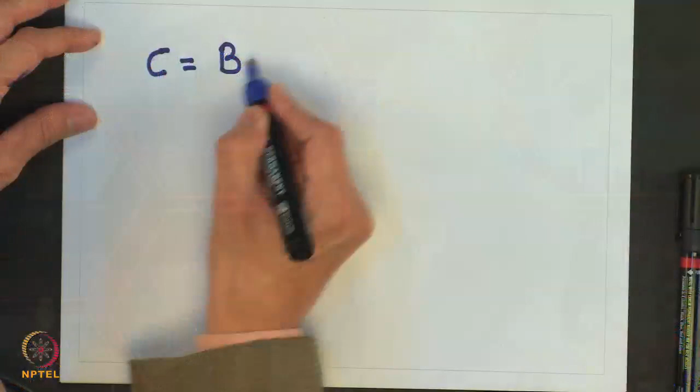We have seen that when the channel noise is additive, white and Gaussian with mean square value given say as NP, the channel capacity C of a band limited channel under the constraint of given signal power P average is given by this relationship. This is the signal power, this is the noise power, bits per second, and this is your channel bandwidth in hertz. Now, the maximum rate of transmission can be realized only if the input signal is a white Gaussian signal.

Okay. The question is now what happens to the channel capacity if I increase say signal power. From this expression it is very clear that when I increase the signal power my capacity will also increase. But what will happen if bandwidth increases? Say it goes to infinity, will channel capacity also go to infinity? Superficially the equation seems to indicate that, but this is not however true.

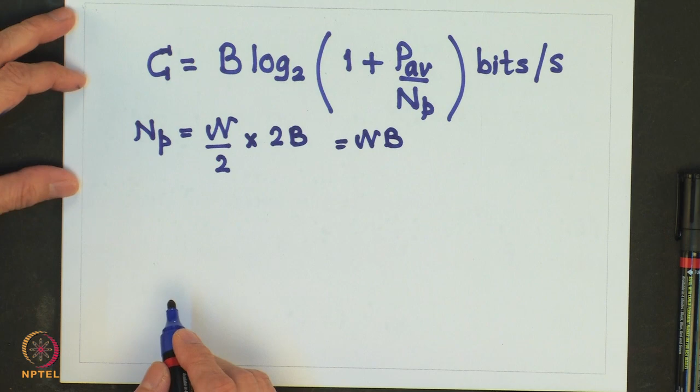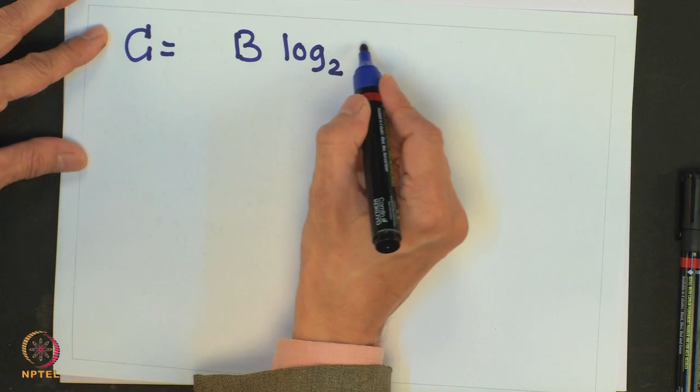The reason for that is basically to realize that the noise power NP is equal to power spectral density multiplied by twice the bandwidth. So, when the bandwidth increases, the noise power also increases. So, let us try to evaluate the channel capacity when B tends to infinity. So, our C is equal to B log to the base 2 of 1 plus signal power divided by noise power. Let us take the limit of this for B tending to infinity.

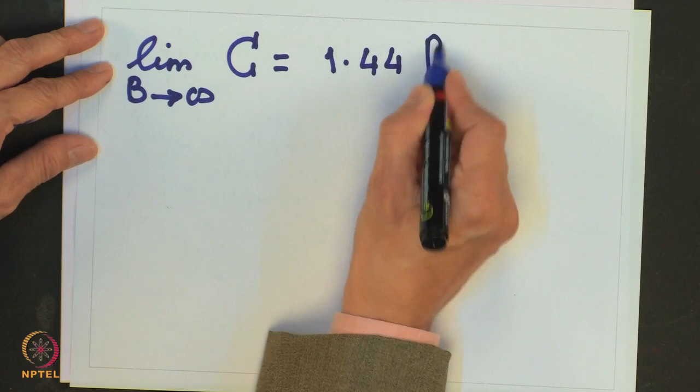This I can rewrite as, and the reason for doing this is basically I want to exploit this identity which says that limit x tending to infinity of x log to the base 2 of 1 plus 1 by x is equal to 1.44. So, now if I use this identity, it is very clear from here that my capacity when B tends to infinity is equal to 1.44 P average by W

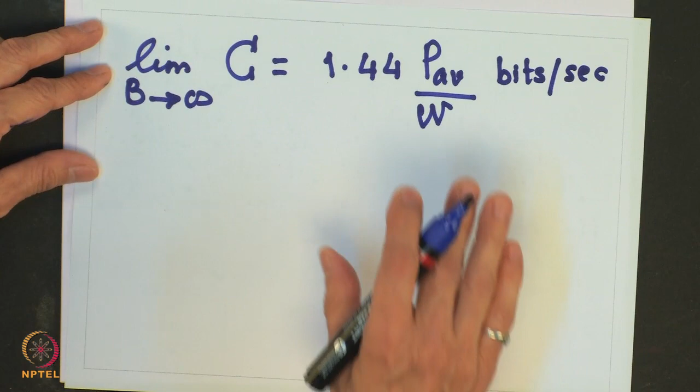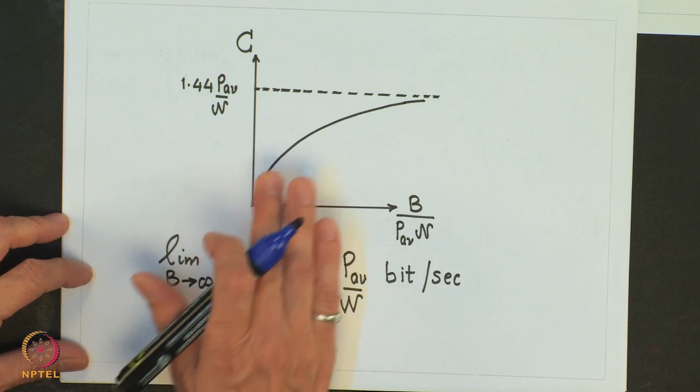bits per second. So, for a white Gaussian channel noise, the channel capacity C approaches this limit as B tends to infinity. The variation of channel capacity with bandwidth is shown in this figure. From this figure it is evident that capacity can be made infinite only by increasing the signal power to infinity. For finite signal and noise power, the capacity will always remain finite, and this relationship we just derived.

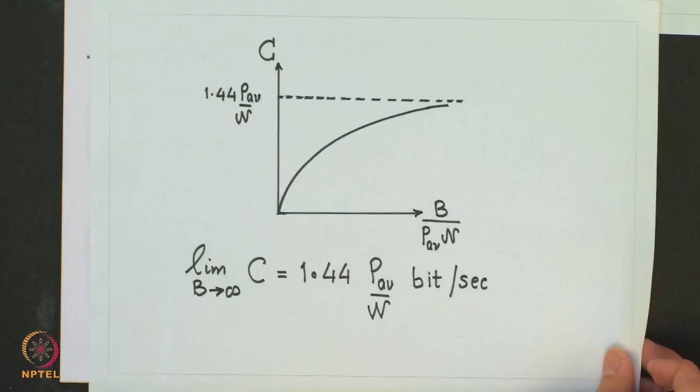Okay. Now, it is also instructive to express the normalized channel capacity, which is C by B, as a function of signal to noise ratio per bit. In digital communication, unlike analog communication, this plays an important role. We will see this later in our course also. Signal to noise ratio per bit is an important parameter, and we will see what that is.

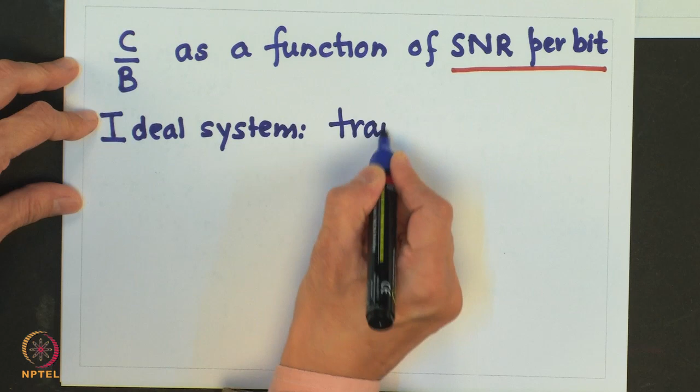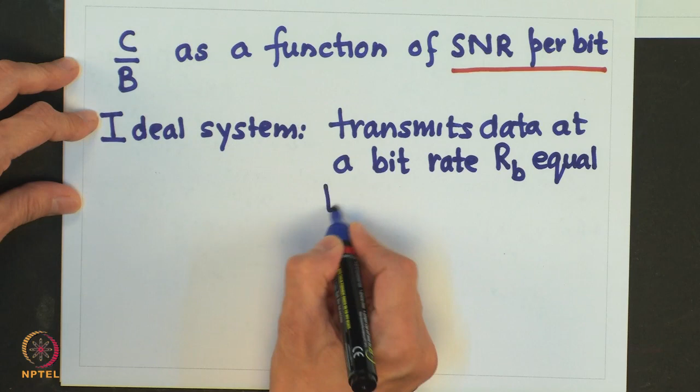So, let us assume that we have an ideal system. What is that ideal system? It transmits data at a bit rate, this is information bit rate, RB equal to the information or channel capacity C.

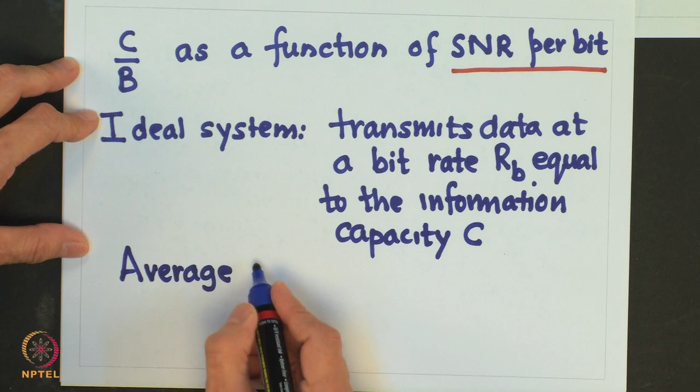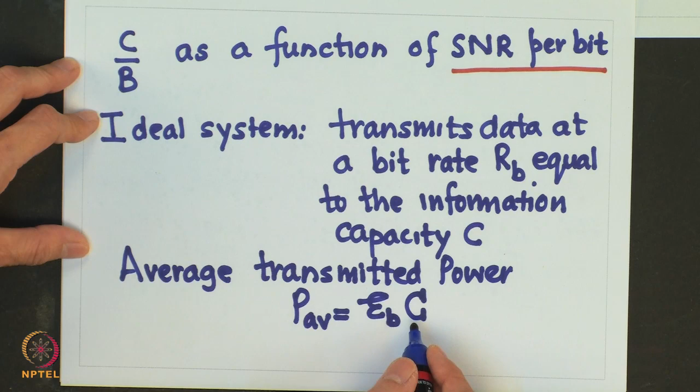So, now if we assume this, then we also know this relationship: average transmitted power, which is P average, is nothing but energy per bit multiplied by the rate, and in our case we are assuming an ideal system. In an ideal system, the rate is same as the channel capacity C. So, if that is the case, then I can write my channel capacity expression as follows.

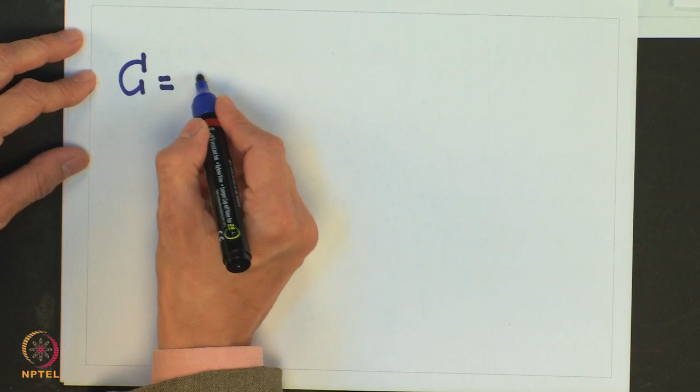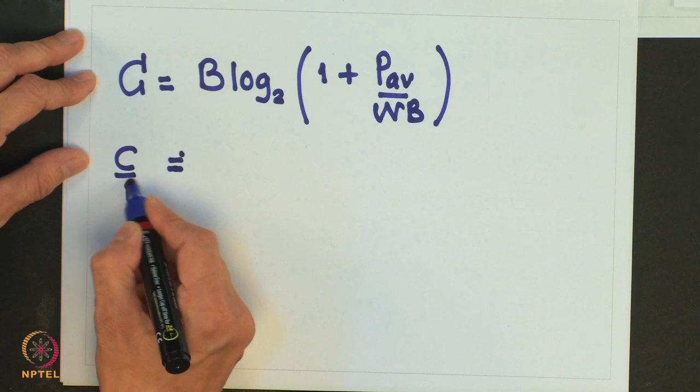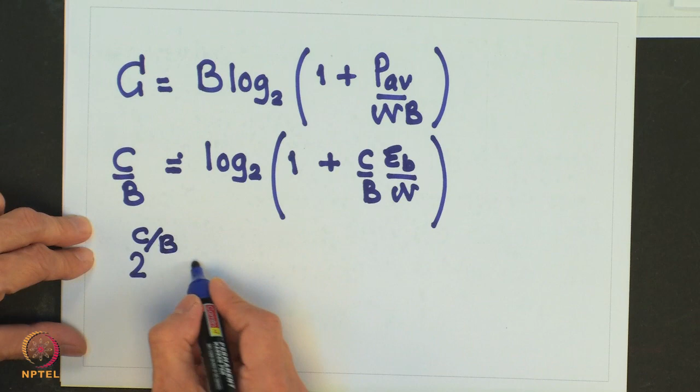So, C by B, for P average I substitute this quantity, and EB by this italic N is known as signal to noise ratio per bit. Fine. So, from this relationship it is easy to see that I will get, from this I get signal to noise ratio per bit is equal to this quantity.

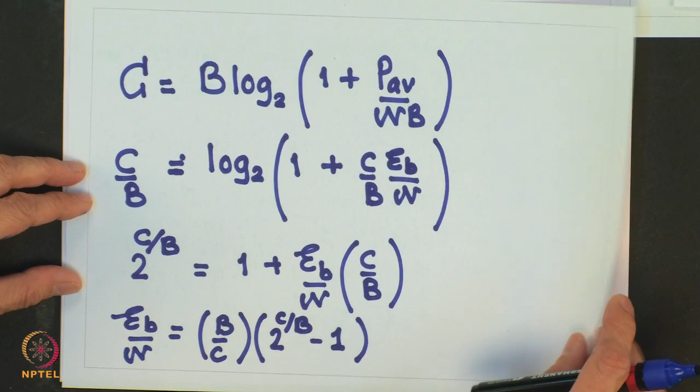Now, we will see the plot of the signal to noise ratio per bit and normalized rate. But before we do that, let me try to evaluate what would happen to this signal to noise ratio per bit when the bandwidth becomes infinite. Now, this C by B is equal to log to the base 2 of 1 plus

Now, let Z equal to this quantity. So, I can write my C by B from here as equal to, very simple, this will get cancelled and I will get this quantity which is equal to this. So, what I get from here is that Z is equal to this quantity. So, I can write this

Why am I doing all this? Because I want to see what happens to this EB by N, the signal to noise ratio per bit, when this quantity tends to 0, that is B tending to infinity.

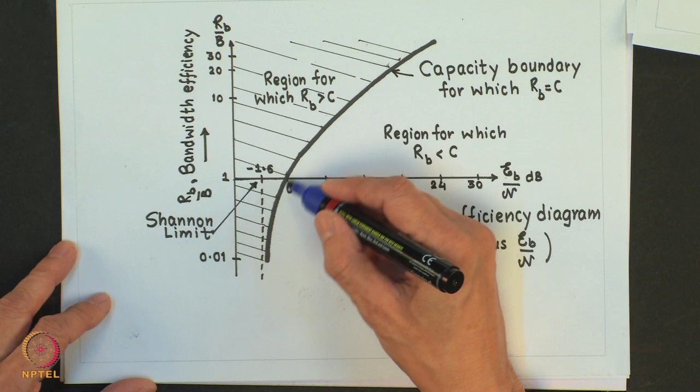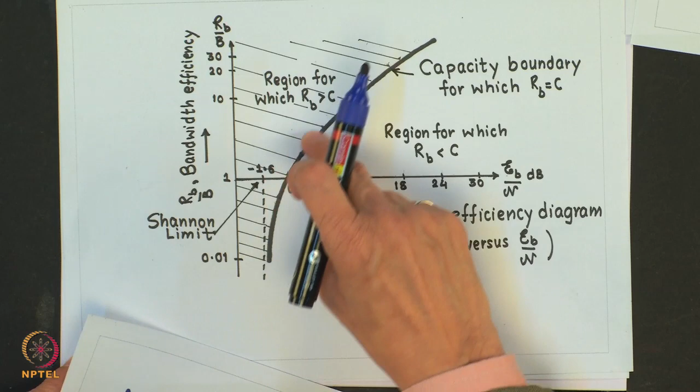So now coming back to this equation, let us plot this equation. So here is the plot for that. If I plot that equation, this is the curve which I get. So Eb by N is here, and this C by B basically is this. So this is your ideal system where my transmission rate is the same as the channel capacity C, okay.

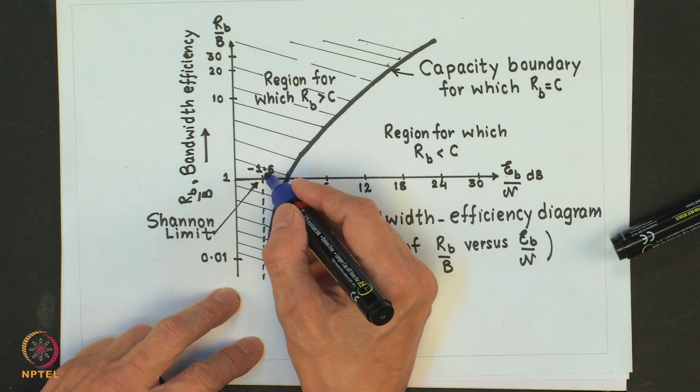And we have also seen what happens in the limit when the bandwidth goes to infinity: this quantity goes to 0, and Eb by N, the signal to noise ratio per bit, goes to this. That is why you see that as this quantity goes to 0 on the y axis, this value will tend to minus 1.6 dB. So this is the curve, okay, fine.

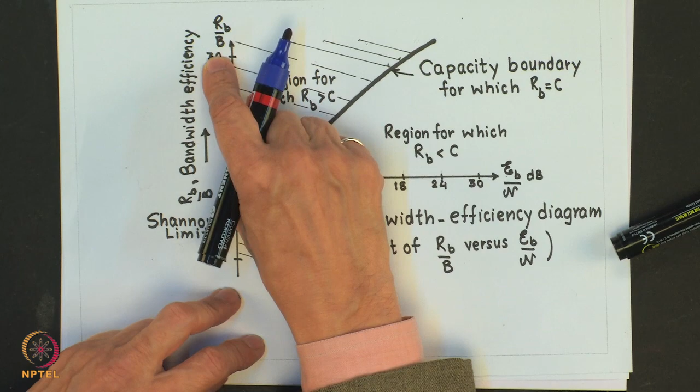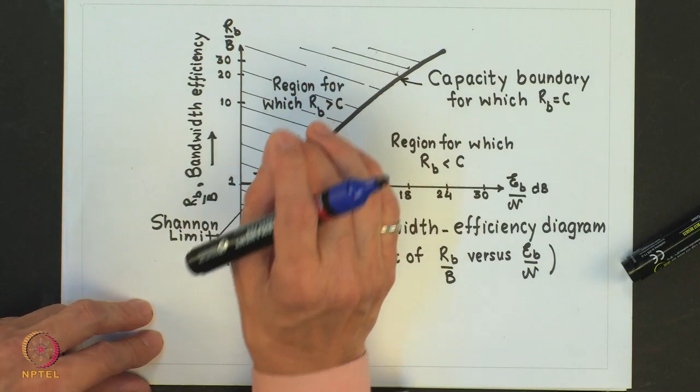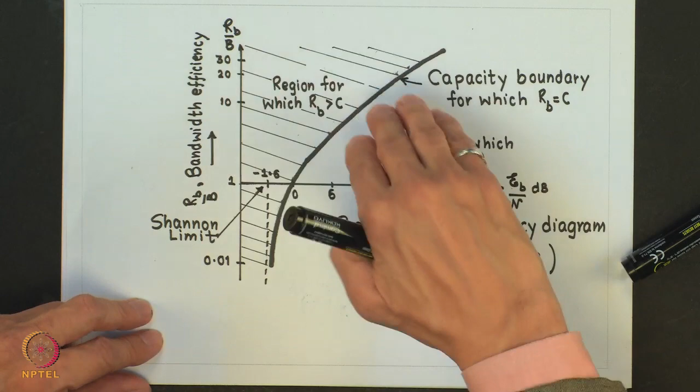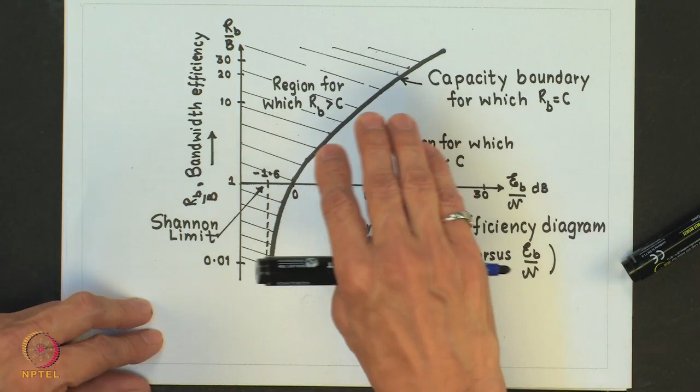Now on the x axis we have signal to noise ratio per bit in dB, and on the y axis what I am showing you is the normalized channel capacity. In general, if the transmission rate is greater than channel capacity C, you will be lying in this region above this. And when your rate is less than the channel capacity C, you would be operating in this region. Now by Shannon's coding theorem, the rate of transmission has to be always less than or equal to the channel capacity. This we have seen earlier.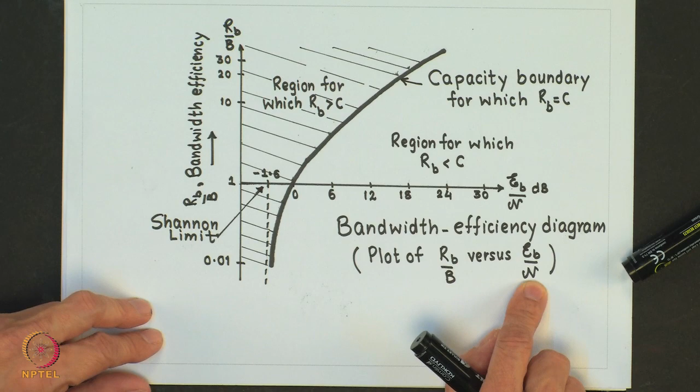So your region of operation is going to be this side, whereas this portion is the region where you cannot get error-free transmission. So this is Shannon's limit for the signal to noise ratio per bit, and this is known as the bandwidth efficiency diagram, which is a plot of Rb by B versus Eb by N. And remember, this is a capacity boundary for the ideal system, that is Rb is equal to C. So there is a prohibited region of operation, and the region of operation will be below this curve, and this is known as your capacity boundary. This is a critical rate, Rb equal to C.

So with this we come to the end of the module on information theory. Let us summarize our study of this module. The motivation for studying information theory was to address two key issues in the evaluation of the performance of a digital communication system: the efficiency with which information from a given source can be represented, and the rate at which information can be transmitted reliably over a noisy channel.

We began our study with a discrete memoryless source, and we provided a mathematical model for it in the form of a source alphabet consisting of source symbols and the associated probability distribution. We defined a measure of information for the output symbol Sj as log to the base 2 of 1 by Pj, where Pj is the probability of occurrence of Sj. Then we defined the entropy of the source, the average information per symbol, and showed that it is maximum when the distribution is uniform, meaning Pj is equal to 1 by k for all j equal to 0, 1 up to k minus 1, where k is the number of symbols in the source alphabet S.

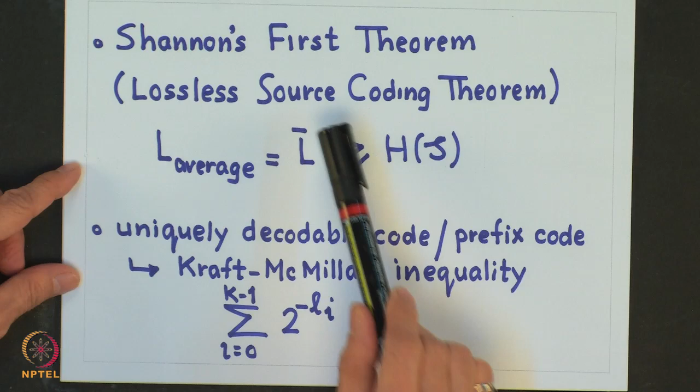Then we studied Shannon's first theorem, also known as the lossless source coding theorem, which said that the average length of the source code can never be less than the entropy of the source. We also mentioned the Kraft-McMillan inequality, which is the necessary and sufficient condition to be satisfied by all uniquely decodable codes or prefix codes, and this condition is on the length Li of the code words of the code.

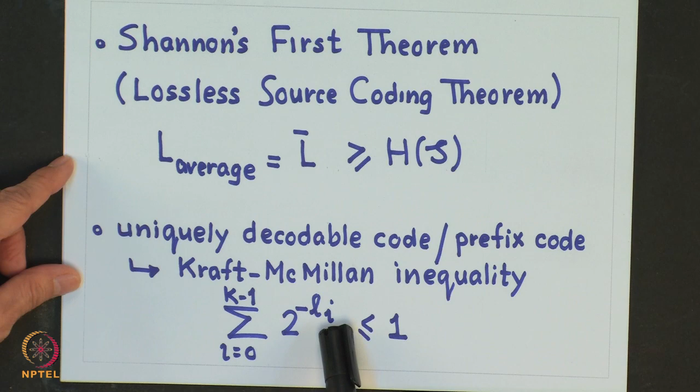And what we saw there was that if we had Pi equal to half raised to the power of an integer alpha I for all I equal to 0 to k minus 1, where alpha I is an integer, then the length of the code words could be chosen to be equal to that integer alpha I, and in that case the average length of the code turns out to be equal to the entropy of the source, which is the minimum value which you can have.

But if this condition is not true, that means if Pi is not of the form half raised to some integer alpha I, then we said that if we follow this strategy of choosing the length of the code word Li to be the smallest integer greater than or equal to log to the base 2 of 1 by Pi, then we can show that the average length of the code turns out to be within 1 binit of the entropy of the source.

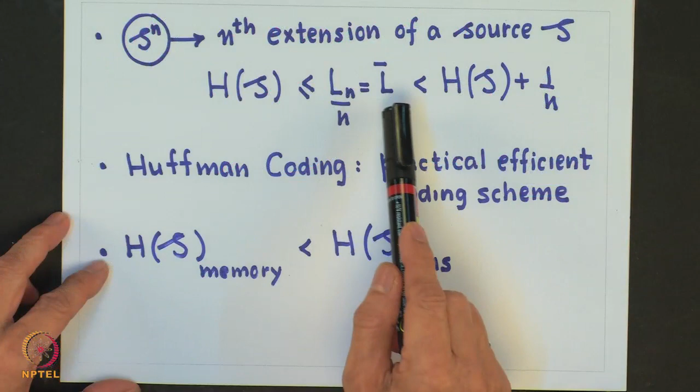And using this strategy, we said that we could get the average length of the code as small as possible, but not less than the entropy of the source. So what we mean is as close as possible to the entropy of the source by using the nth extension of the source for coding, but in the process we will be increasing the complexity of the coding.

And then we studied Huffman coding, which is a practical efficient coding scheme for obtaining the compact code, and we also mentioned that the entropy of a source with memory is always less than the entropy of the source for discrete memoryless source. We define information channel in terms of input alphabet and output alphabet, and the relation between the two is given in the form of channel or stochastic matrix. The element in this channel matrix is nothing but the conditional probability of the output symbol given the input symbol.

Then we went to define what is mutual information. This is the amount of information which gets transmitted on a channel, and we showed that this mutual information turns out to be the difference between the entropy of the input alphabet and the conditional entropy of the input alphabet given the output alphabet. And then we define the capacity of the channel to be the maximum value of this mutual information, and we showed that for a given channel this maximization takes place over the probability distribution of the input alphabet.

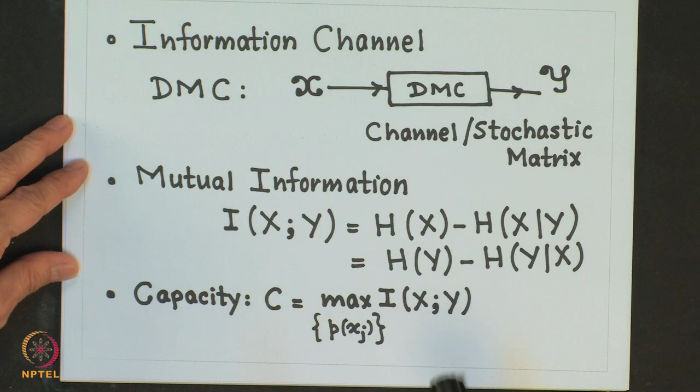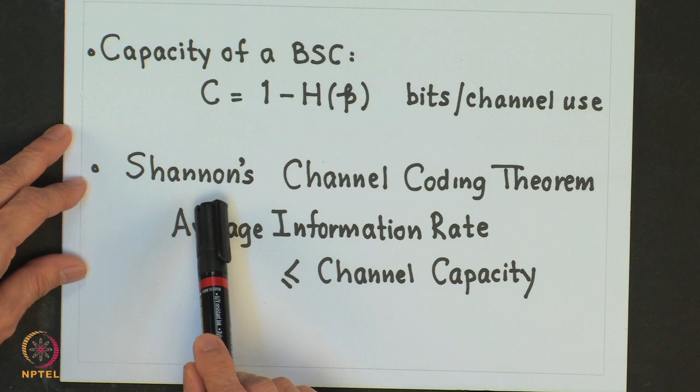Having done this, we computed the capacity of an interesting practical channel, that is binary symmetric channel, and we showed that the capacity of this channel can be maximum equal to 1 bit per channel use. And then we studied another important theorem which is known as Shannon's channel coding theorem, and what that theorem states is that for reliable transmission with the error as small as desired, the average information rate has to be less than or equal to channel capacity.

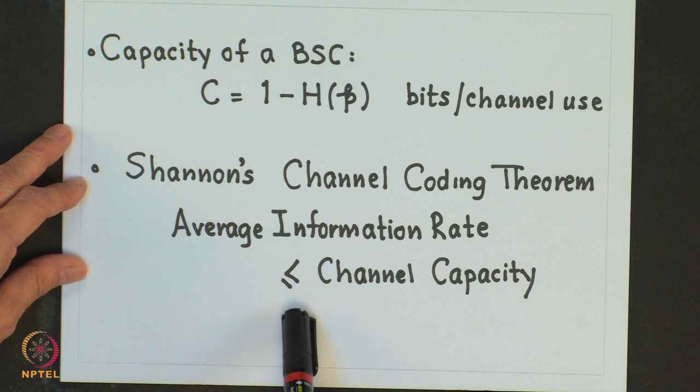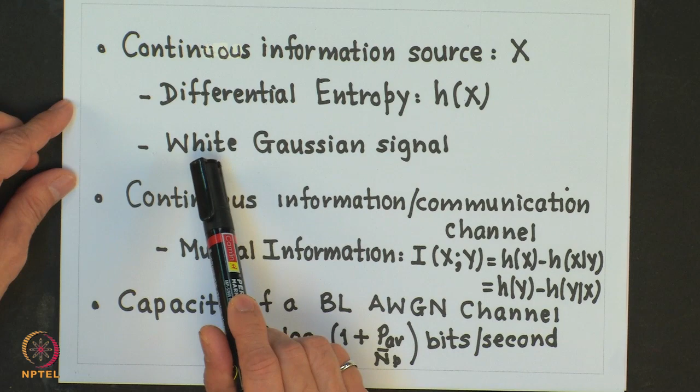Then we moved over to the continuous information source, and we defined the output of the continuous information source in terms of random processes, random signals and random variables. And what we showed was there we could define what is known as differential entropy, which is different from the absolute entropy. It uses some kind of a reference or datum, and then we showed that for any band limited signal which is constrained to have certain mean squared value, the white Gaussian signal which is band limited has the maximum entropy per second.

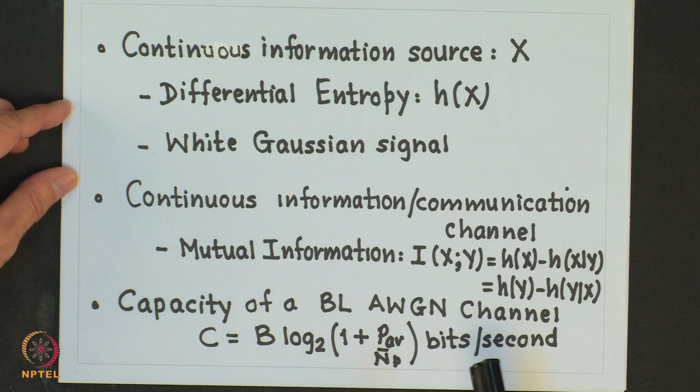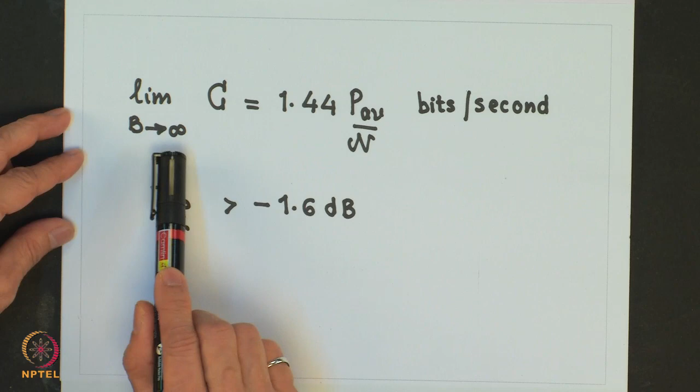And then we moved over to the study of continuous information or communication channel, and again we showed there that the mutual information turns out to be the difference of the differential entropy of the input and conditional differential entropy of the input given the output. And then we evaluated the capacity of a band limited additive white Gaussian noise channel, which is of practical importance in design of communication systems. And we showed that the capacity of a band limited additive white Gaussian noise channel when bandwidth tends to infinity is limited by this value given on this slide.

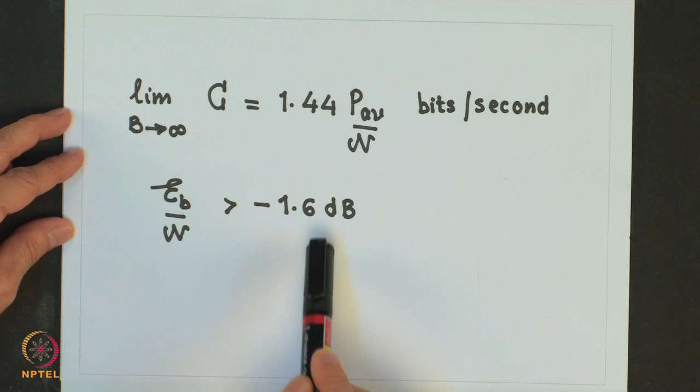And we also showed that the minimum signal to noise ratio per bit which we could have for reliable transmission, which is also known as Shannon's limit, has to be larger than minus 1.6 dB. So in short, Shannon's first theorem, which is lossless source coding theorem, and Shannon's channel coding theorem address both the issues of efficiency of information representation from a given source and the maximum rate at which the information can be transmitted reliably over a noisy channel. So with this we come to the end of the module on information theory.